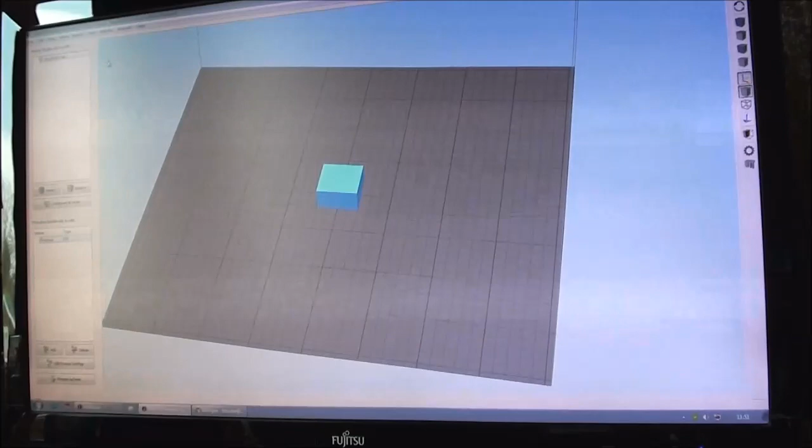We start with loading a cube 20x20x10, then we edit the settings, we set infill to 0, we set our extrusion multiplier,

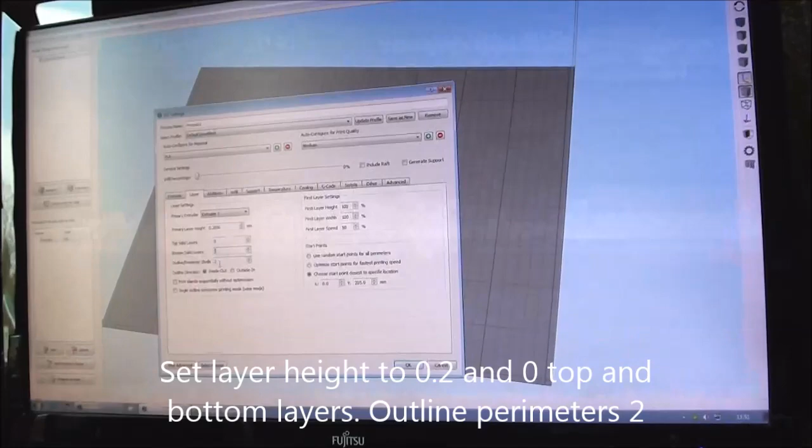we go to layer, I use 0.2, top solid 0, bottom 0, outline perimeter 2, and also I use skirt and offset 0, skirt outlines 6, and 1 layer.

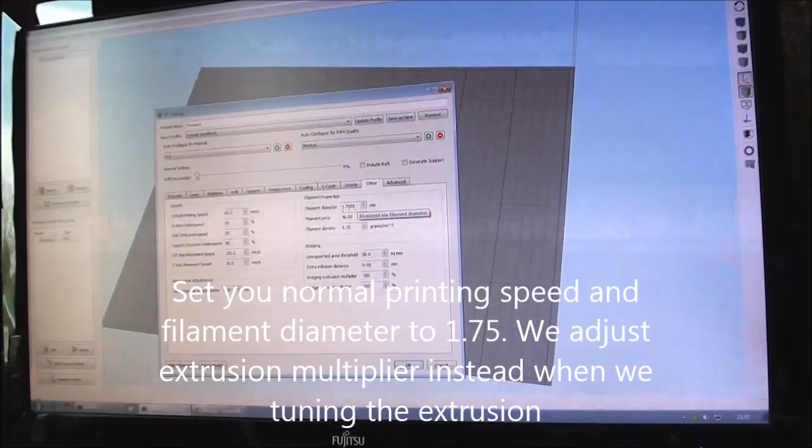In the other tab we have the speed you normally print with, filament diameter. Normally you should measure your filament diameter and put it in here, but I found it much easier if you just have it here at 1.75, and instead we use extrusion multiplier to calibrate.

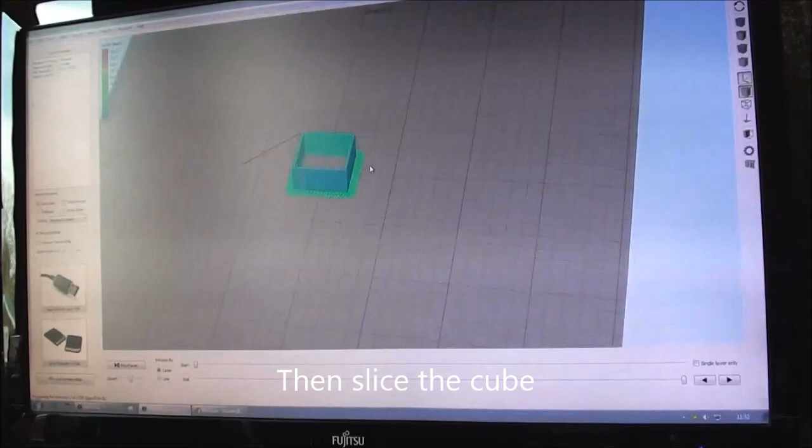Then we just slice it. It will look like this. 2 shells and a skirt. Then we print it.

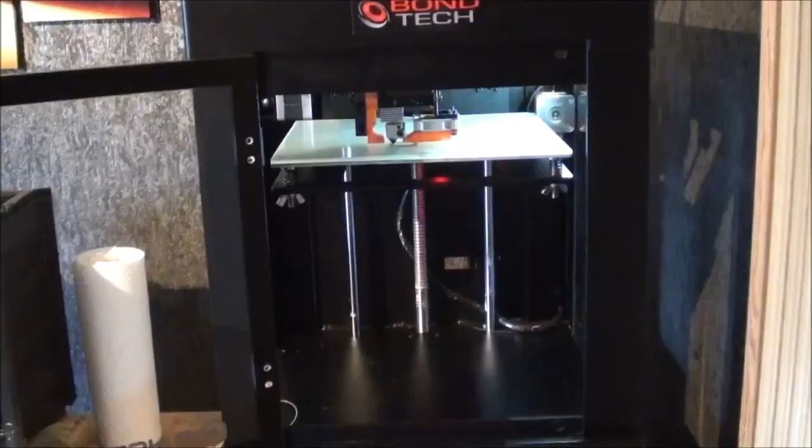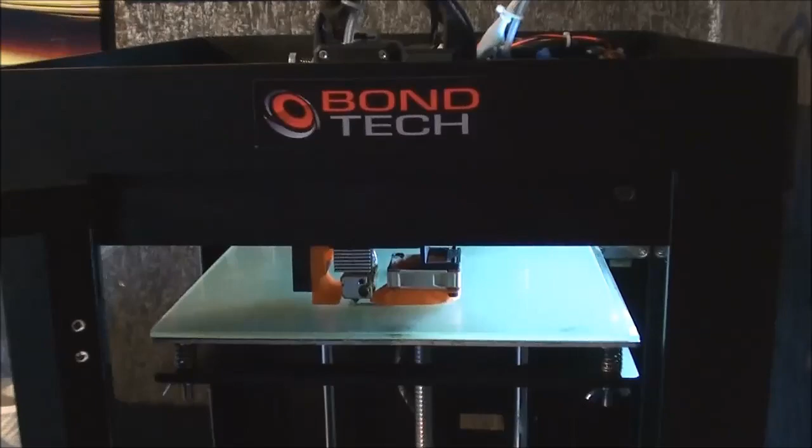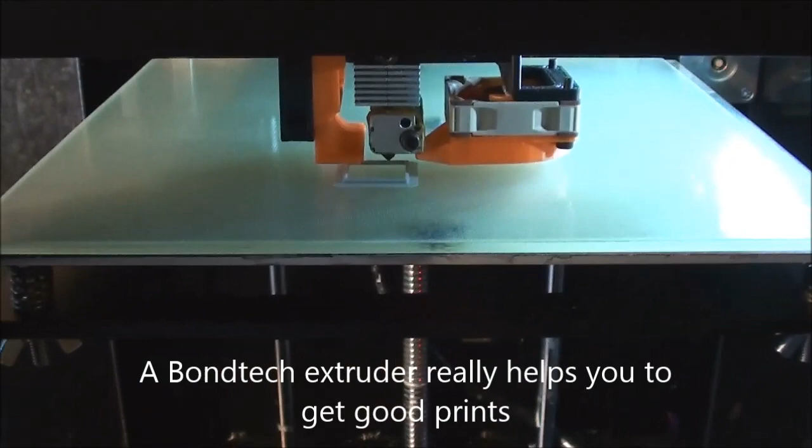So I use my 3D printer, Raise3D N1. I use a Bondtech extruder. It's very important to have an extruder that is good for this. And we're printing. And this will take like 5 minutes. So it's quick to do, no problems.

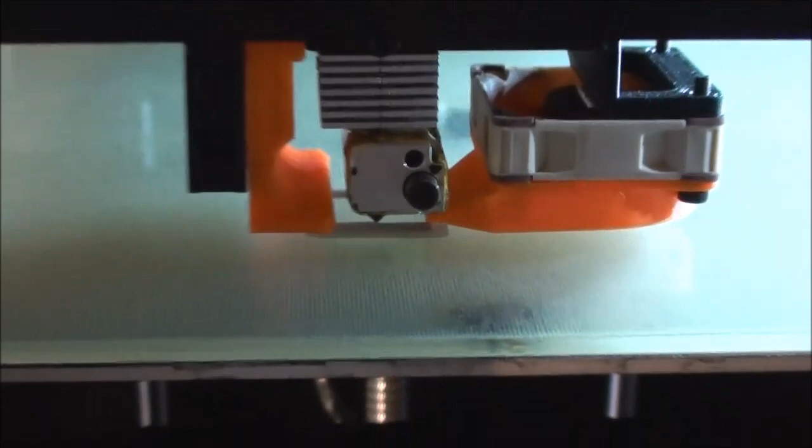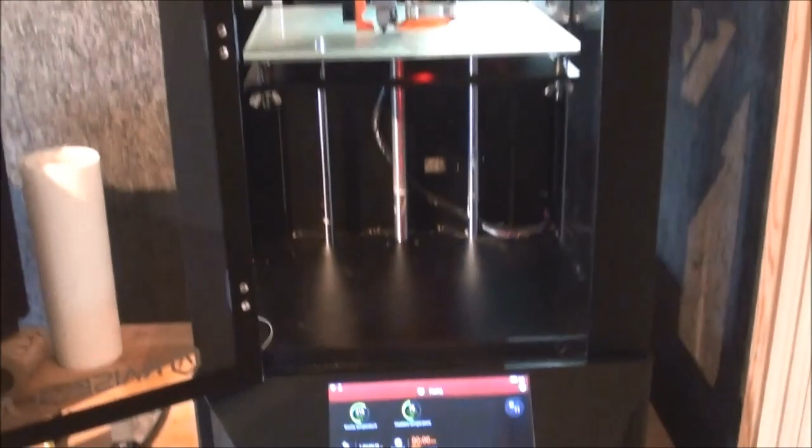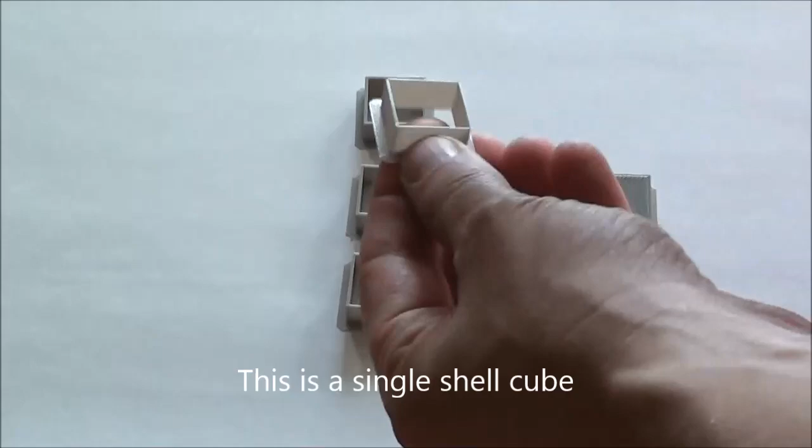So these are some examples, and I failed to mention in the first part that extrusion width is 0.48, so 1 shell should be 0.48 and 2 shells 0.96 and so on. I did a single cube just to show, and it's almost 0.48, but it's still a bad way, and you may get some under extrusion if you use this method to calibrate.

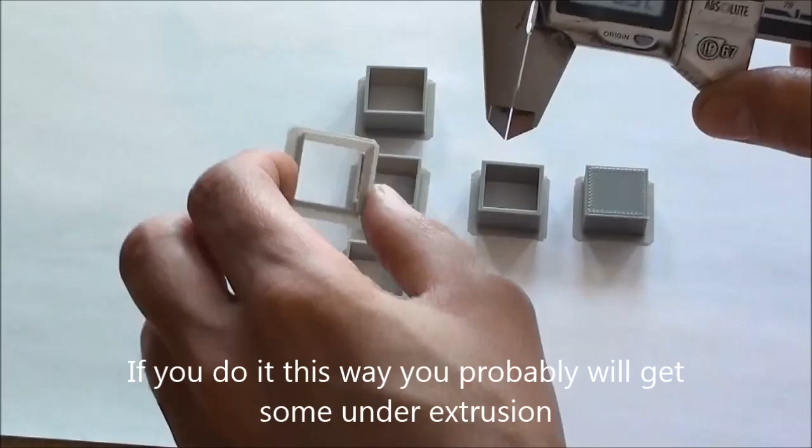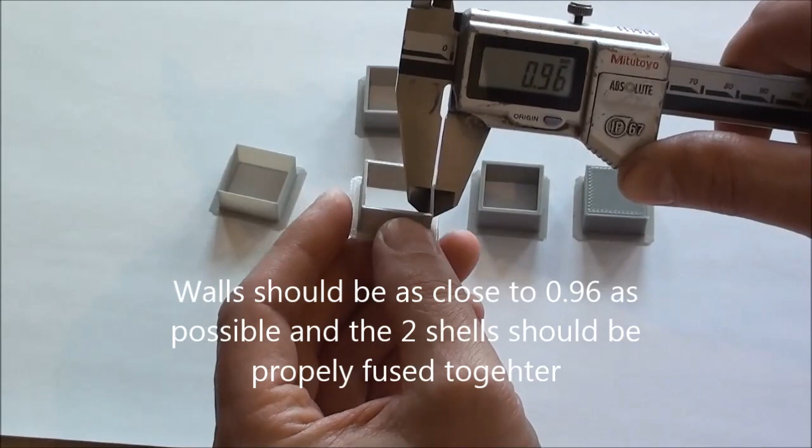This is 2 shells, and it should be 0.96, close. You don't need to be perfect, but pretty close. The main part here, why we use 2 shells, is that we want the 2 shells to fuse together. We'll show this later.

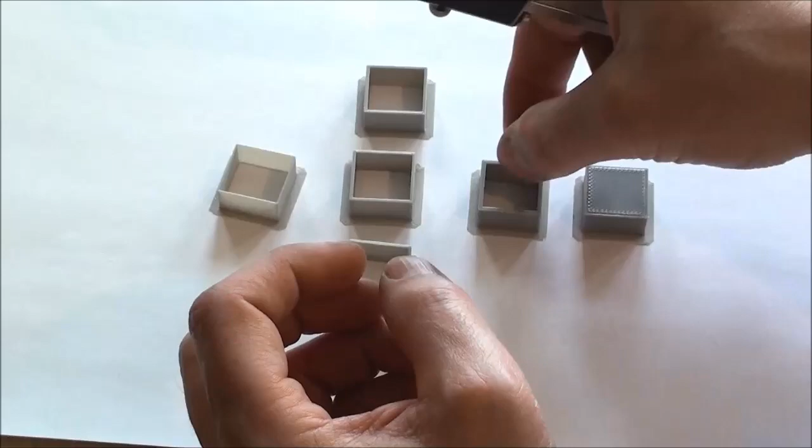I also did 3 shells, and it should be 1.44, I think. It's just a bit over. But if you are close like this, it's no problem. It's good.

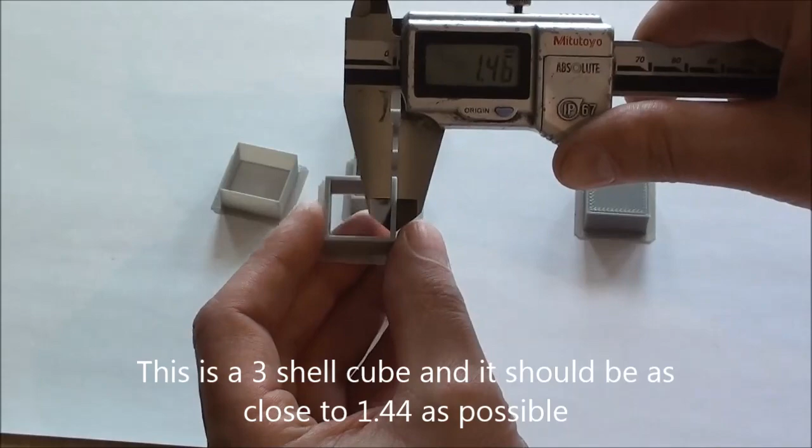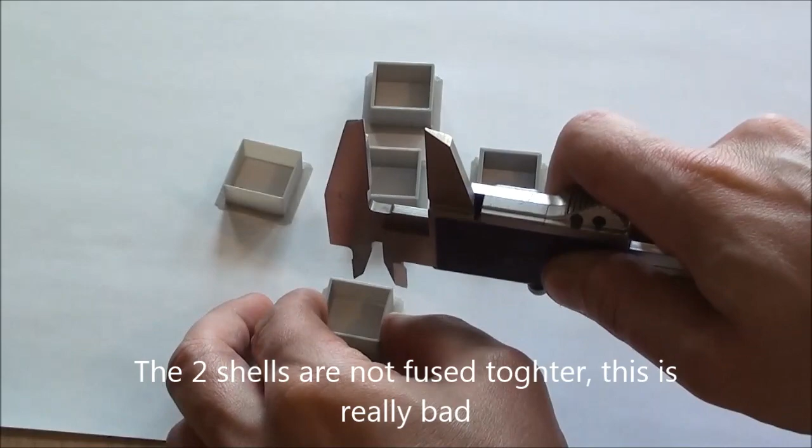And this is 2 shells, and I have put down the extrusion multiplier to 0.82, I think, and it looks nice. Shells are good, no problems. But if you measure it, it is not good at all. And the 2 shells, they are not fused together. You can take something sharp and just separate the layers. This is bad.

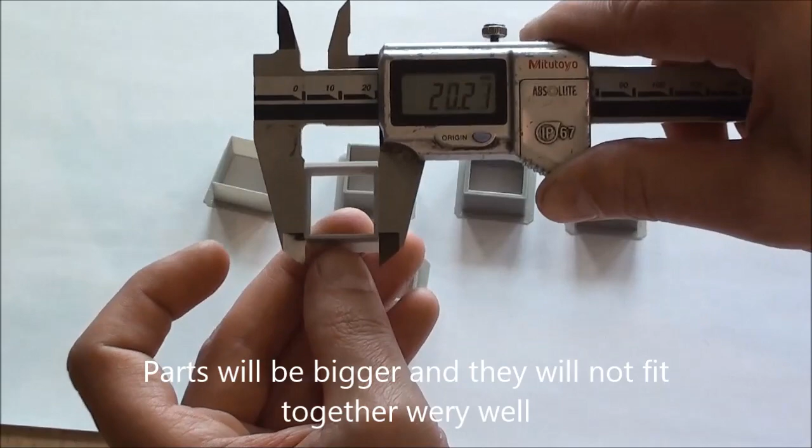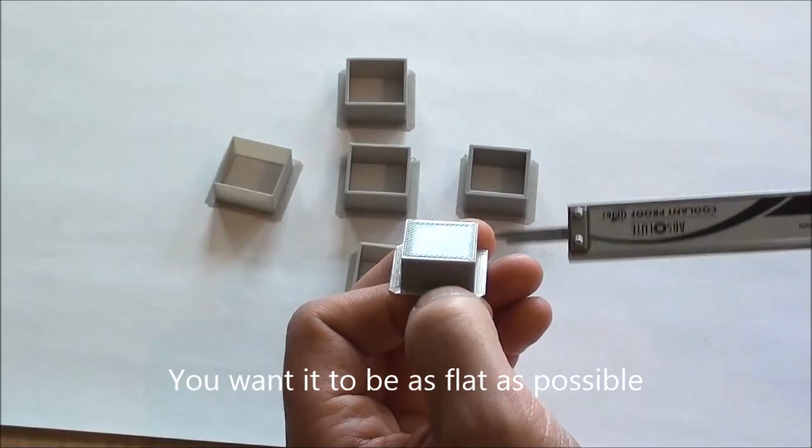And last we have this 100% infill cube. This is the normal way to do it, and the point with this test is to look at the top and have a flat surface. But I think it's quite hard to see and it takes longer, so I use these two shells, and if you get it right and measure the walls like I did, this will always be good. This is the way I do it.